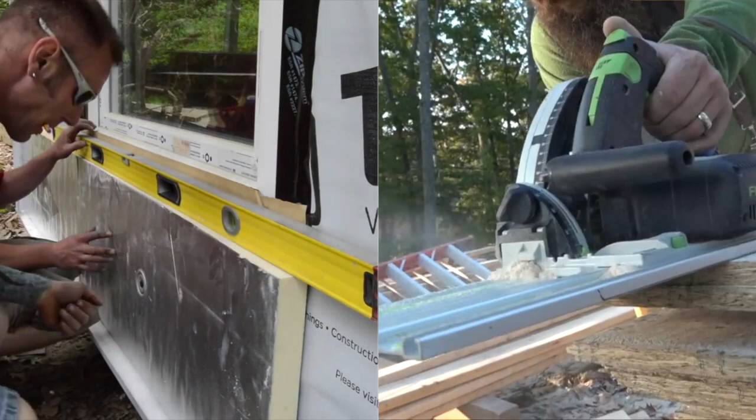We can get going again. We can get started on super insulated walls. Fat walls mean skinny energy bills. So I'm going to go over 4 different configurations for a fat wall, for a highly energy efficient wall.

There's a lot of ways to build super insulated walls. Continuously wrapping the outside of a house with some sort of an insulation like foam boards or rock wool is one way. Adding a second wall on the inside so you can blow tons of insulation into the cavity is another way. That would be double stud walls.

Thickening the wall on the outside so you can blow tons of insulation into the cavity would be another way, although less common in the real world. Exterior I-joists. And hyperbolizing a pretty standard system to make everyone pay attention to it is the 4th way, the awesome wall.

So these are just 4 ways to go about it. There's a lot of ways to go about it, but I think they illustrate different methods that are pretty different and how they solve different problems that you come up with.

The first one is going to be continuous exterior insulation. Sometimes people call this outsolation. I resist that with all my might. I hate that term. Lately, people have been calling it continuous insulation, which I think makes more sense because it is actually continuous. It says what it is, and it doesn't invent a new dumb word to describe it. I still kind of call it exterior insulation because I'm stubborn.

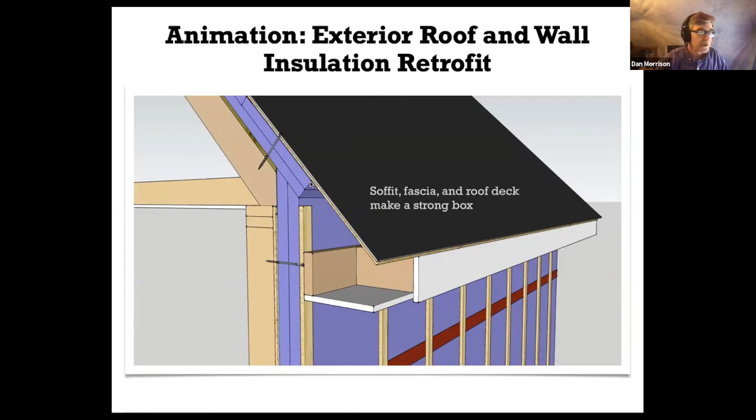So here's another early animation that I made right before we launched Pro Tradecraft. It's based on job site guidance from the remodeler who does a lot of work for Joe Lstiburek and Building Science Corporation. His name is David Joyce. Not only does David know what to do and why it matters, he knows where the beer is at Joe's house. So here's the animation of an exterior wall and roof retrofit.

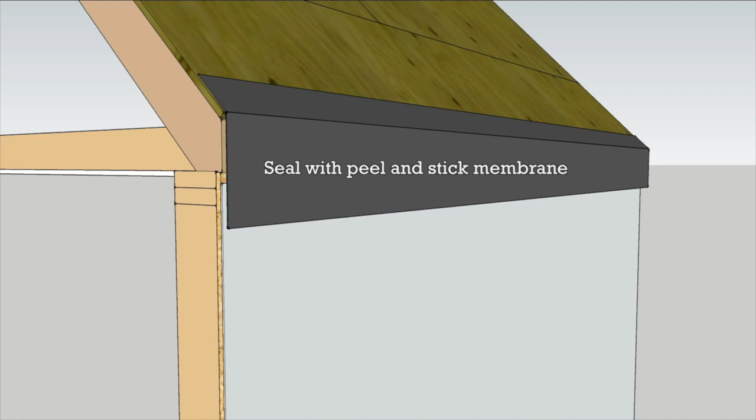Adding exterior insulation to the roof and walls of an old house can improve comfort and energy efficiency. It especially makes sense if the rafter cavities are already insulated, and it's most affordable when the roof and siding need replacement. The first order of business is to strip the roof and walls. Next, cut off the rafter tails so that the connection between the roof and walls can be sealed with peel and stick membrane. Install 2 layers of foam to the roof, staggering the seams and offsetting the joints.

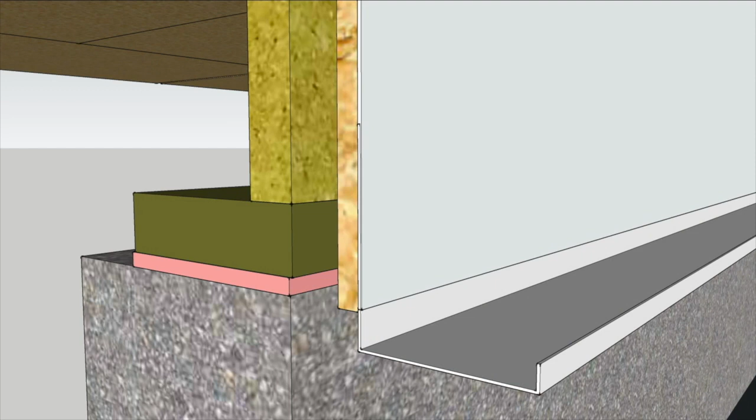Tape the seams on the outer layer. New roof sheathing goes on top, screwed into the framing 1.5 inches. Cover the roof deck with roofing underlayment that will protect against liquid water, but also allow vapor to escape. At the bottom of the wall, a piece of coil stock is bent into a J-channel to keep the bugs out. The metal is tucked behind the house wrap, and 2 layers of insulation go on the walls with the outer layer's seams taped for an air seal.

Attach a strip of bug screen to the bottom of the wall to keep the ventilation channels clear. At the corners, weave the foam panels together to disrupt any clear air path between inside and out. Corners are then wrapped with peel and stick to keep them tight. Furring strips are screwed through the foam 1.5 inches into the framing. Box out a soffit at the top of the wall and tie it all together with fascia.

Install the siding, making sure to detail the bug screen tightly at the bottom of the wall. Continuous insulation and multiple layers of air sealing turn a leaky old house into a 21st century home.

Copyright 2015. So we've been talking about this at Pro Tradecraft for 6 years, but we were talking about it at Fine Homebuilding and Green Building Advisor for at least another 6 years before that. In fact, that's how I met those guys. So it's not new, but it seems new to a lot of people, and now it's actually even in the building code. So let's have a peek at how Dave and his crew do it in the real world.

Again, Dave works a lot for Dr. Joe. This is not one of Dr. Joe's projects, but he uses the same details that he learned from the Building Science Corporation. It's a typical split entry ranch that was gutted and retrofitted into a weird modern house. Fun fact is the owner was an engineer, so it's kind of like the worst customer in the world is a retired engineer. So not only is he engineering, but he's got a lot of time on his hands.

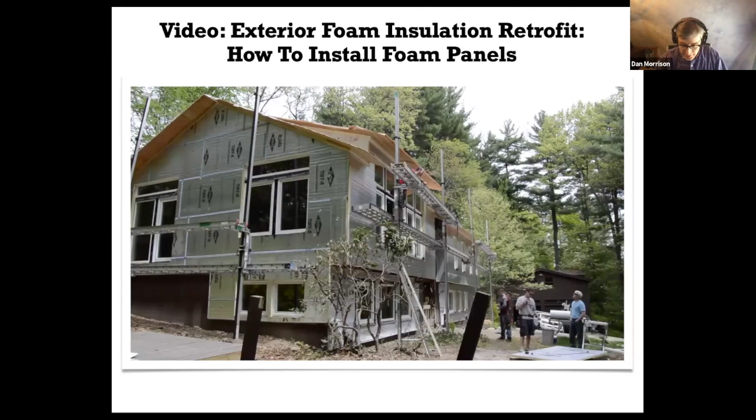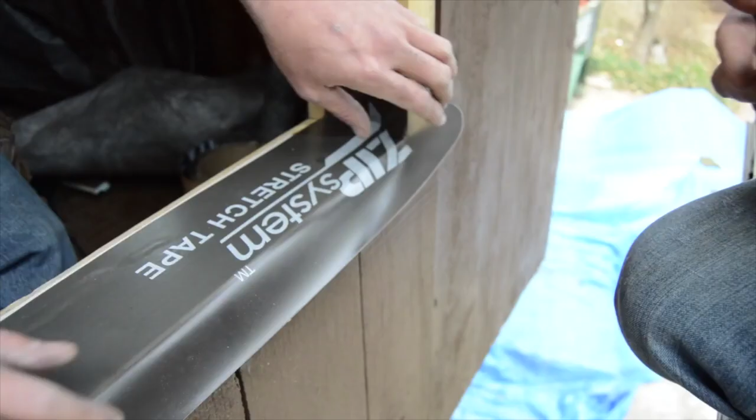Welcome to Concord, Massachusetts. This house is undergoing a deep energy retrofit and gut rehab. To boost the R value, 4 inches of polyisocyanurate foam is being added to the walls and roof. The siding, a sheet product designed to mimic vertical boards, is structurally sound, so it's being left in place and then covered with house wrap and foam. The windows were installed and flashed to the openings before the house wrap, and then the house wrap is sealed to the windows with a flashing tape.

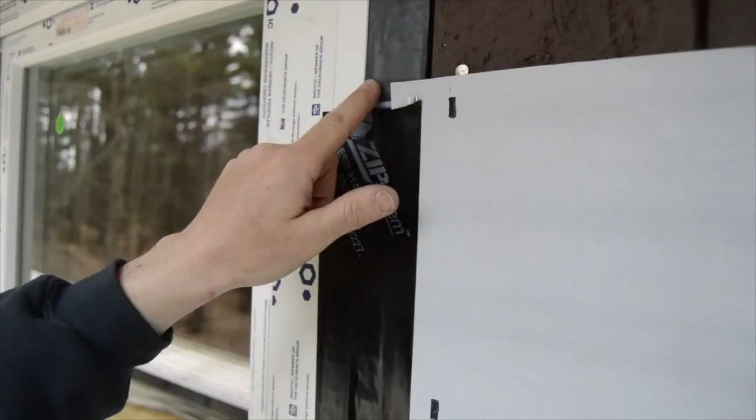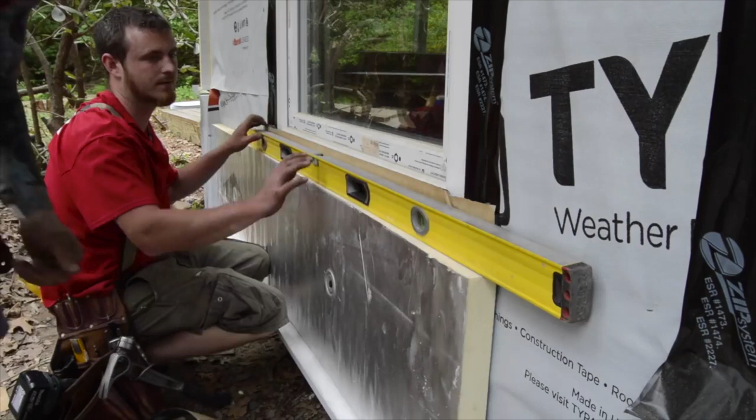Dave explains how flashing tape connects all the layers. Our flashing membrane from the outside, from the window itself, crossing right over the flange onto the sub-flashing and onto the house wrap. The sub-flashing protects our building from any leak that could happen in the window. The house wrap goes over that and is adhered to that, which makes a good air seal and water seal. The pan flashing is extended out so that it can drain water to the outside of the foam sheathing. Extra strips of flashing tape can extend the pan flashing more. This is where a split release sheet on the back of the flashing really comes in handy.

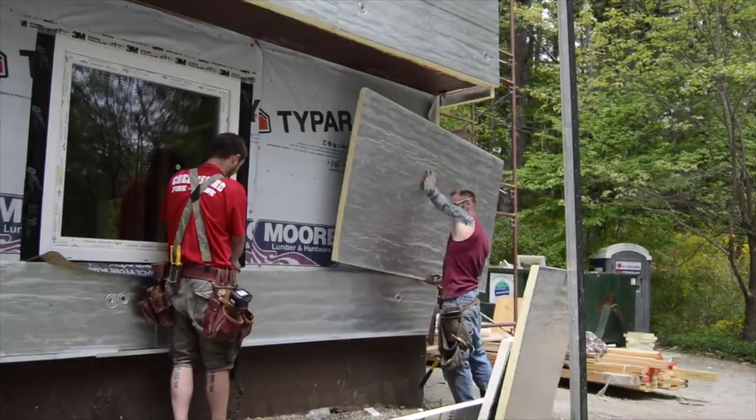The 2 layers of foam should have offset seams, so Calvin and Damien begin with a small rip that will fit continuously under the windows. The first course is kept level to keep the measurements consistent, and a metal cap at the bottom protects the foam from insects. It's great to use large pieces whenever possible for a better air barrier, but because there is a layer of house wrap and 2 layers of foam, it's safe to use up some random scraps. As long as it's not like 30. And there will be a lot of scraps. As long as the joints are tight and the insulation is continuous, piecing in scraps should be fine.

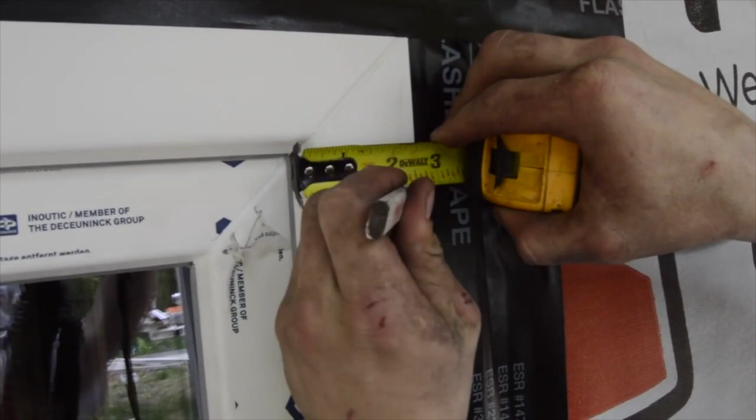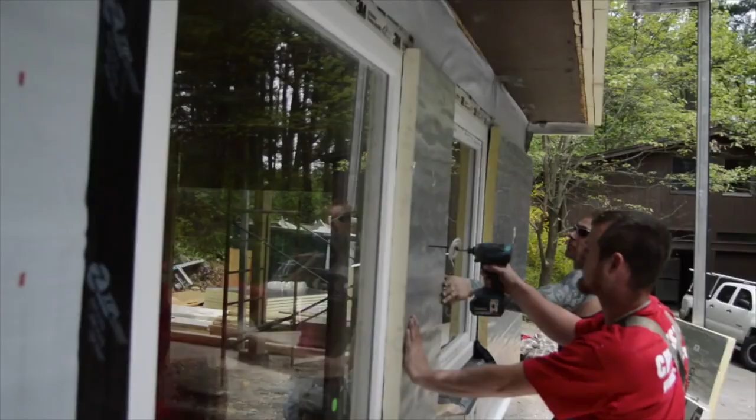As Dave said earlier, the foam will overlap the window frame to get a tight seal to this opening. In this case, the guys are leaving 2 1/4 inches of frame revealed. Also at the window, they pull the pan flashing out past the foam so that anything that leaks in is drained all the way out. Don't bother to tape the seams on this first layer, because as you compress the foam later, it will just pull the tape away from the seam. The second layer will be taped. As one guy installs, he can measure for the next piece. Working together, 2 installers ought to be able to keep ahead of one cut man.

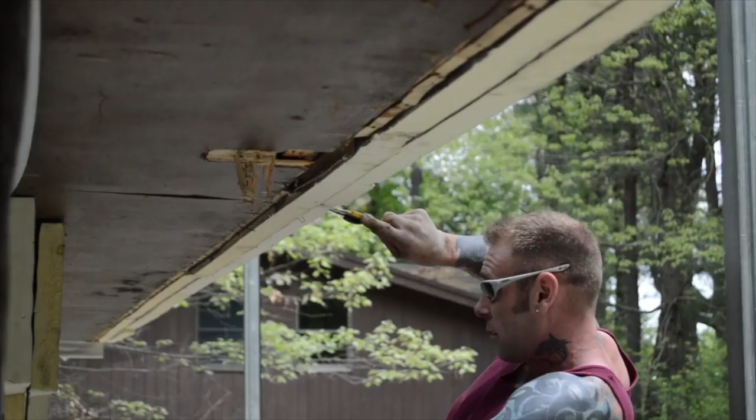Cutting foam sheets is pretty simple. You can use utility knives with extendable blades to get the whole depth on small cuts, and when cutting sheets in place. Angled cuts are needed where wall foam butts under roof foam. For long cuts, you can use a knife and chalk line, or you can use a table saw.

Yeah, so basically everything that we saw in the animation, but in the real world. Flash the window opening first, install the window, integrate the window with the WRB, making sure that everything seals back to the framing, and then leaving no layers open at the edges. It's a recurring theme we're going to be talking about all day today. Install the first layer of foam, not taping the seams, and using offcuts to fill the pieces whenever you can.

In this video, they'll install bigger pieces of foam on the second layer, and then they'll tape the seams and the corners. Again, the foam gets compressed, and if you spend all your time taping the first layer, you're probably not going to get as great a performance. Plus, you're paying someone to spend an awful lot of time taping an awful lot of little gaps with a bunch of little pieces.

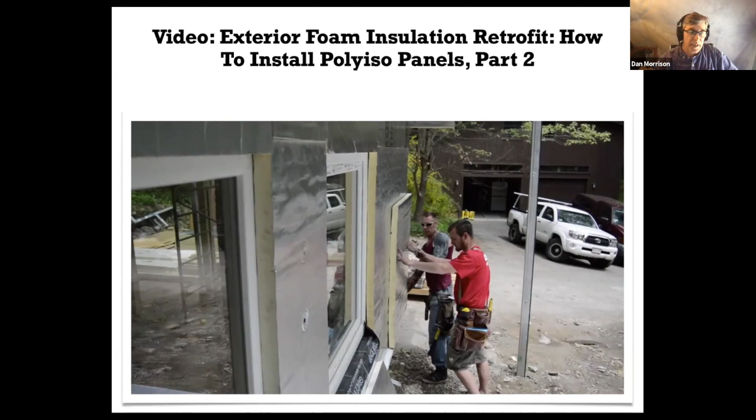So they'll also install furring strips for siding attachment after they install the foam. That's one sort of method of a rain screen, a vented rain screen wall assembly. There's also a few ways to do that. We'll look at one or two more later on. But let's look at the exterior foam job.

With the first layer of a 2-layer exterior foam retrofit installed, Calvin and Damien turn to the outer layer, which will be the primary drainage plane and air barrier. They begin with a starter piece, again attaching it with 2 screws until the furring strips go on.

You may notice that the seams are already taped on these sheets. That's because they wanted to pre-fit the pieces before we shot a video, and then they got carried away and taped the seams. Anyway, the foam is tucked tightly into the bug shield, and they install as close to full sheets as possible. Certainly, they cover seams in the first layer with solid panels in the second.

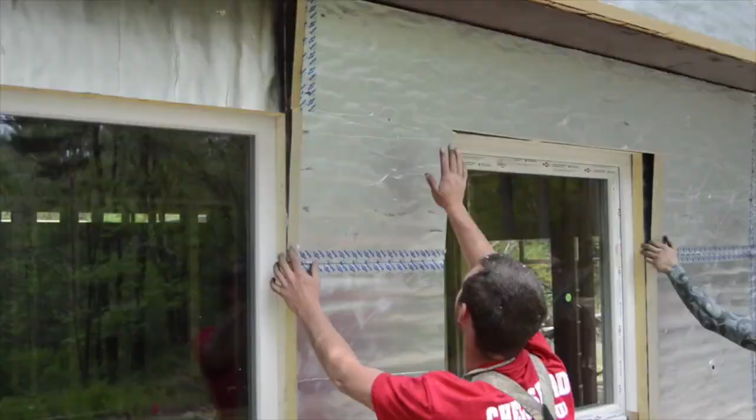Again, the pieces should be snug. Typically, they work from one corner to the other. In this case, the middle of the house is broken up by a large staircase, so they are working from each corner towards the middle. Once the corner is plumb and level, they fasten it off. Again, succeeding pieces should fit tightly. Cantilever sections, like outside corners, have woven edges, so there is no straight line for air or energy leaks.

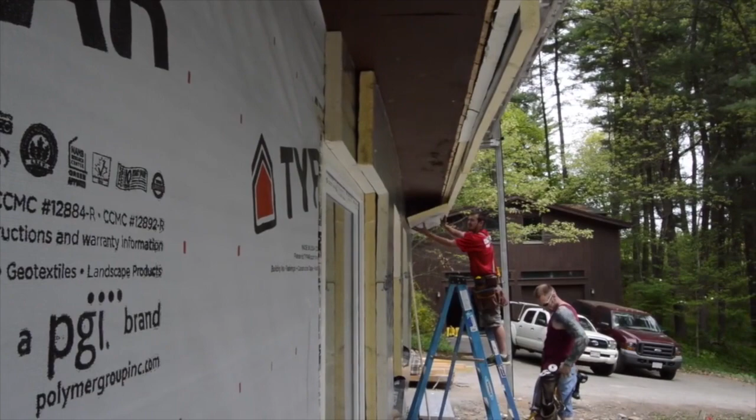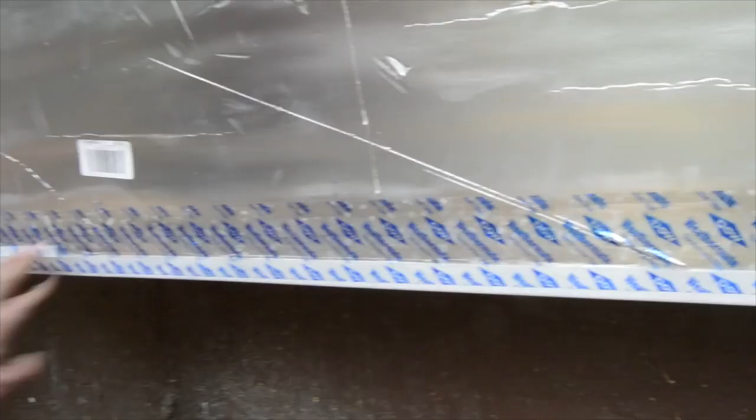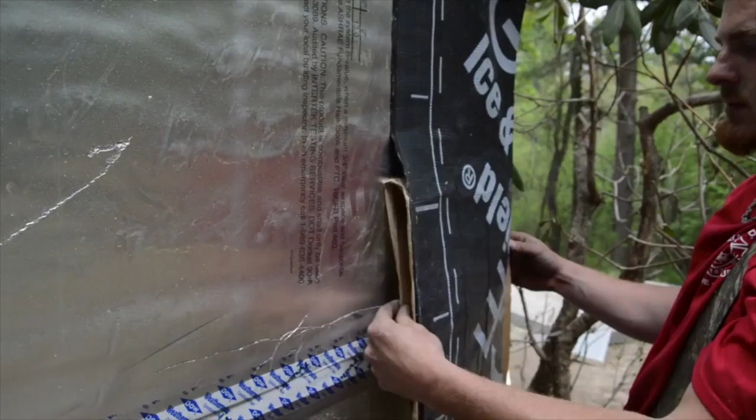The bottom of the foam and any exposed edges, such as at a basement knee wall like this, are wrapped in a metal channel that keeps the bugs out. The metal is sealed to the foundation with silicone caulk. Next, the seams and edges are taped with contractor tape. The metal bug shield is taped to the foam also with contractor tape, as are the inside corners and cantilevers. Outside corners are sealed with a wide strip of peel and stick membrane to cover the staggered corner sheets.

Next, foam under the windows is sliced at a downward angle to extend the sill pans sloping to the outside. And the peel and stick is peeled and stuck to the foam. Calvin explains the process. I think it's better to start from the middle, because then you get less wrinkles and stuff, and you work your way outward. Do a little cut, not all the way into the corner, just a little one, so you can get this stuff rolled over a little bit. So that corner's nice and watertight. Notice that he cuts the corner shy and bends the membrane to keep the bottom point watertight.

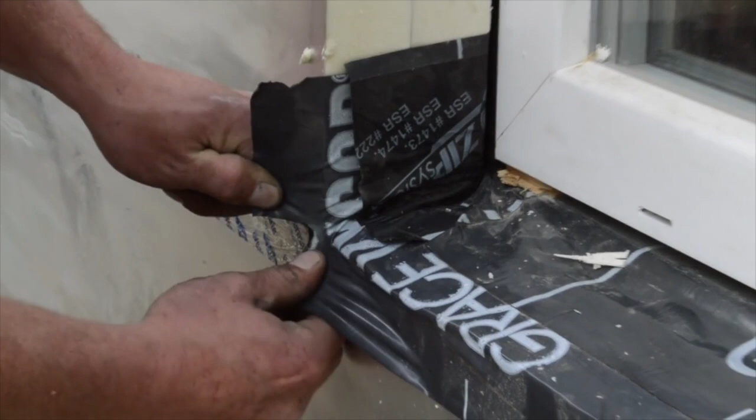With the seams, edges, and corners taped, they turn to installing strapping for a rain screen siding assembly. 1x3 utility grade strapping is fine. The second layer of screws are longer, obviously, than the first layer of screws. These are about 6 inches versus 4 inches on the first layer. The screws are countersunk by cutting partial holes in the furring strips with a spade bit.

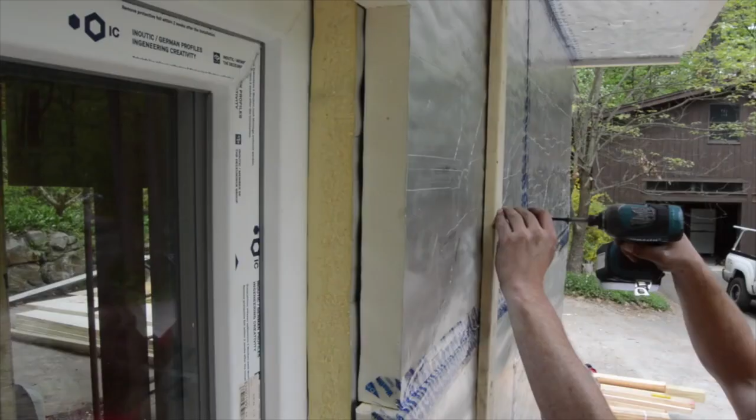As the furring strips are secured to the framing, the foam is compressed inward. This can make for a wavy wall when it's time to install siding. At that time, the crew will pull a string across the entire wall and either drive in the screws or back them out to get a nice flat plane. That string line process is not worth doing now because the wood framing may still expand or contract before it's time for siding.

Okay, so let's head on over to double stud construction. You can do double stud walls many ways. I've seen photos of people lifting double walls that are like a foot thick. I always wondered how they frame them like that. It's probably not that difficult. And I was expecting to see it happen when I visited a job site in Maine where they were building a double wall house. Ben Bogie was the lead carpenter.

But what I saw when I got there is that they just framed the outer walls with 2x4s, stood them, set trusses, got the house dried in, and then came back later and framed inner walls. So it wasn't very exciting to shoot video of, but I was there. It is a heck of a lot faster than framing twice as many walls from the get-go, and it's half as heavy a wall to lift, so it makes sense.

I actually built a double wall structure once back in the 90s. The prevailing advice then in the hippie home building journals was to use like a 2x8 bottom plate and stagger the studs, and then the insulation was woven between them. This is absolutely not the best way to do it at all.

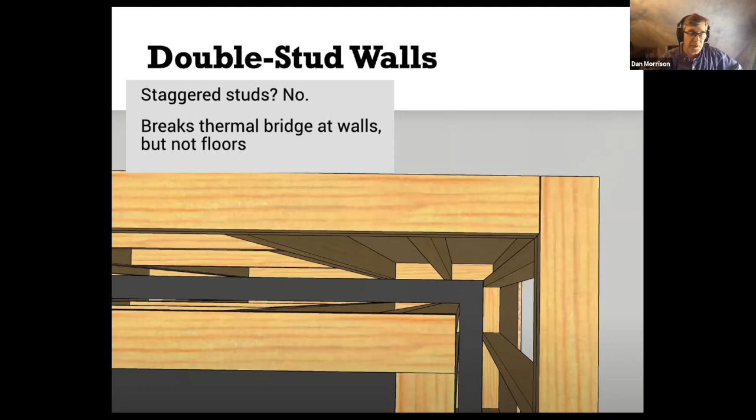The double stud structure that I built was a practice space for a rock band, and we were just looking for soundproofing, and it was pretty darn quiet. But for houses that people live in, you usually want a thicker wall than 7 inches, and staggering the studs isn't necessary. So here's how Ben does it.

We learned earlier from Ben and his crew how to frame basic exterior walls using 2x4s. It may have seemed like a low bar on the energy efficiency scale, but that's because the house will have 12-inch thick walls using a double wall approach. With the outer walls framed, sheathed, stood, and capped with a roof, the crew can turn to framing the inside walls. Tight up to the plate.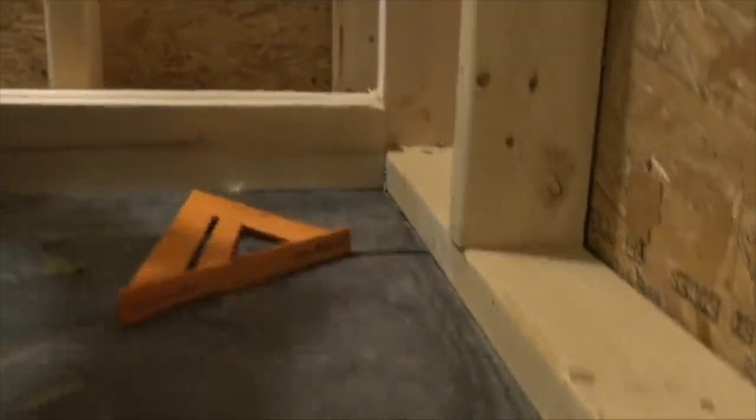Begin with plate stock butted to the outside wall. And then what I'll do is I'll measure. We're going for 12-inch wall thickness, minus our 3.5 inches for our intersecting plate. So I'll mark my plate cuts there. Let's take another look at what just happened.

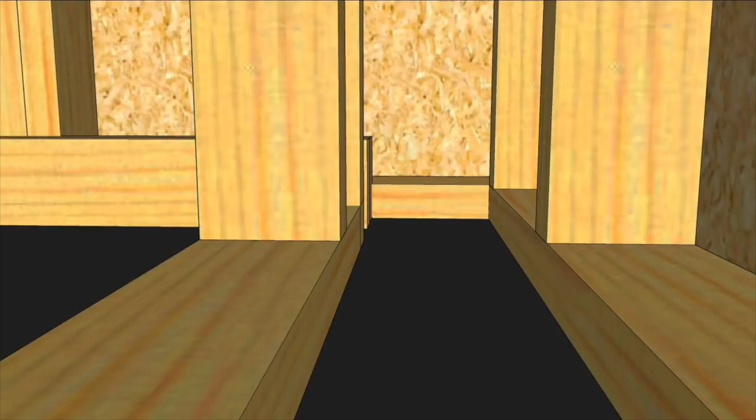It's as simple as just coming right across, transferring your layout of your existing. Copy the wall layout on the inner plates, including windows and doors. Break the ends on studs just like regular wall framing.

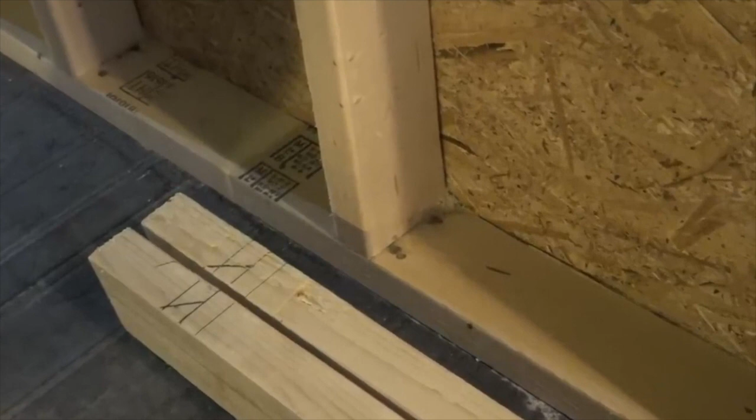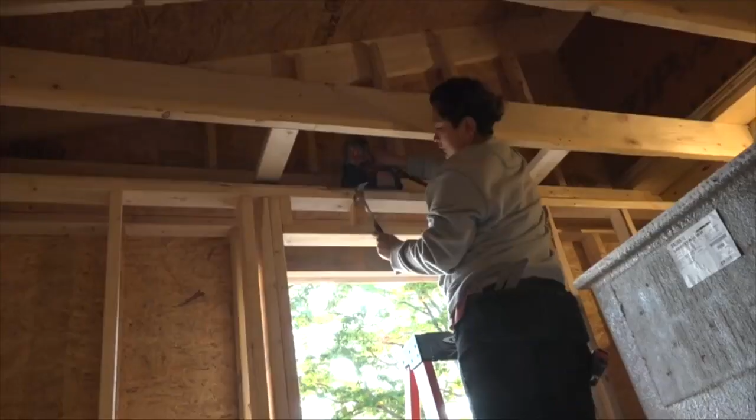These hieroglyphics contain a lot of information. The marks begin at the correct line and cross over the line that should be ignored, and also indicate what side of the line is waste. They transfer layout marks from the top and bottom plates to headers and sills, and they fill in the window and door openings. To reduce alignment problems, they frame the interior openings to be slightly larger than the exterior ones. The header on this door is about 1/4 inch higher than the header in the exterior wall.

With the window and door openings framed in, it's time to install window bucks to bridge the opening. Ben uses sheets of 3/4 inch subfloor ripped to just under 12 inches. Obviously, the rough openings need to be framed 1.5 inches wider than the window schedule calls for if you're going to buck out the openings with 3/4 inch subflooring on each side.

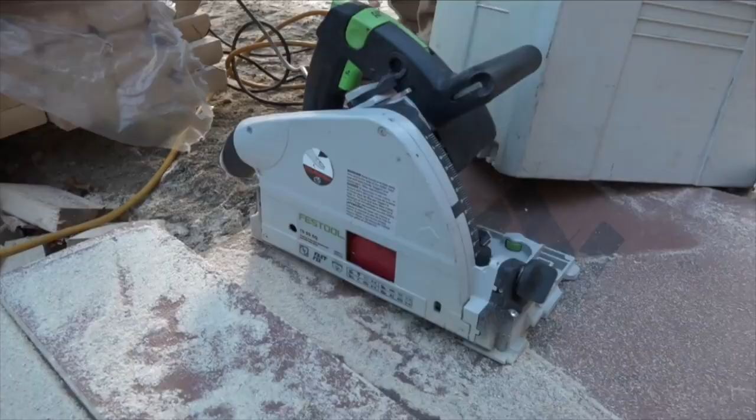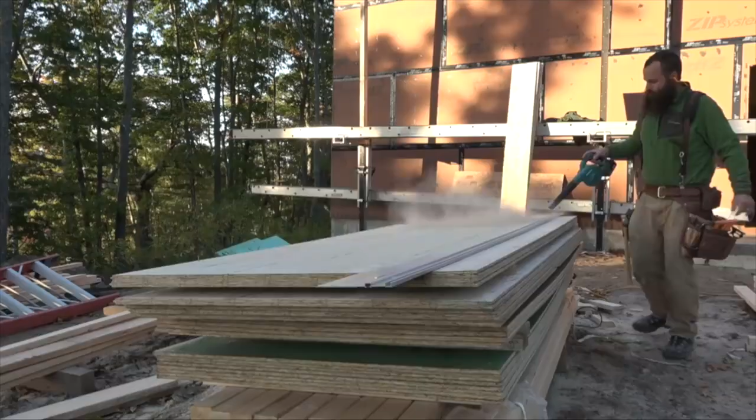Combined with the blade thickness of a few cuts and the size of the gap that's engineered into the size of these sheets, he should end with just a whisper of a rip at the end, mostly just cutting the tongue. Align the edge of the track to the marks, plop the saw on the track, and cut. Looks like it was 11 3/4. He cuts the sides, tops, and bottoms to length using blocks strategically placed to either support the stock or let it drop.

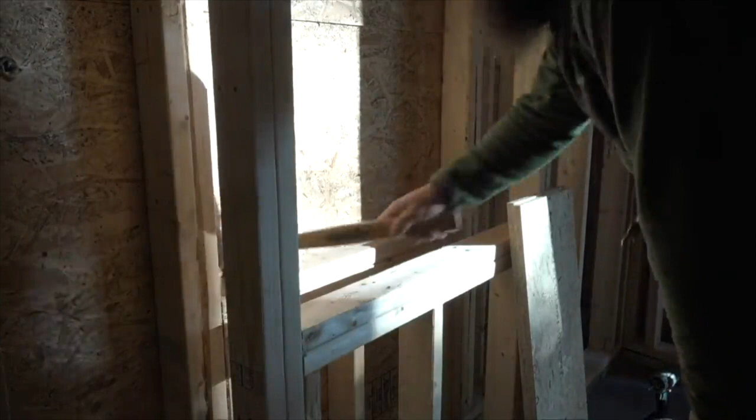Inside, he places the bottom buck first, but first he whacks the framing a bit just to remind it who's boss. The bucks are fastened to the framing of the exterior wall only. They're also aligned with the outer edge of the framing, which means the inside edge is inset about a 1/4 inch from the face of the framing.

Yeah, total wall thickness is 12 inches, so I rip them a 1/4 shy because if we have any bow in our wall, I don't want them protruding past and having to come back and either sand them or cut them off. There's nothing critical about the inside edge. Nothing references off it.

We'll set the bucks, waterproof them, and then later, after everything kind of has a week or two to acclimate, before we go to set the windows, we'll shim the openings so that we know that they're dead true, square, plumb. It's not super critical, but that's the game plan.

With the bottom and top bucks in place, he slips in the sides. Again, the critical edge on the window bucks is not the inside one, as Ben noted earlier, because nothing references from it. The critical edge is the outer one, snugging up against the wall sheathing.

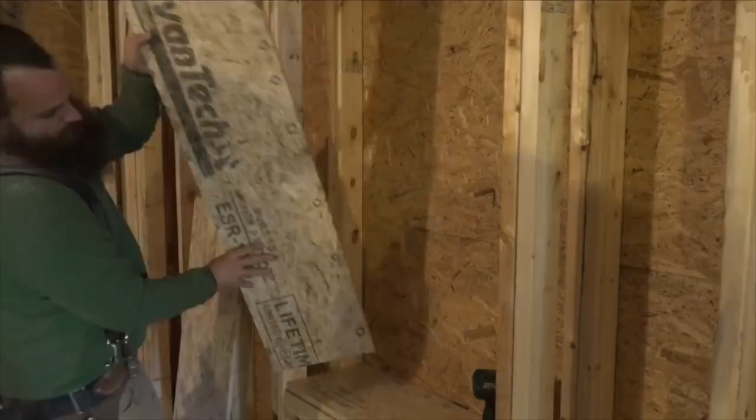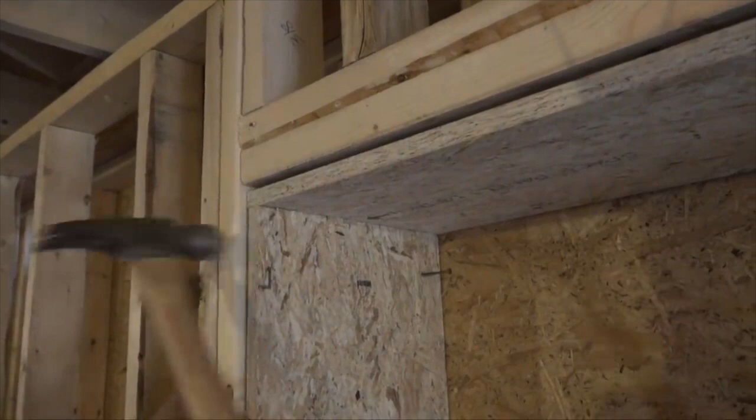Now, all that's left to do is cut out the sheathing. Rather than blind cutting with a worm drive, Ben uses a router and flush cutting bit. He drills a location hole for the router, pokes the bit through the hole, moves sideways and down, and runs along the bottom buck. Now, he glides the router around the window openings until he gets back to where he started. After cleaning up the edges, he'll be ready to apply some liquid flashing to the window openings.

Next time. So frame the outer walls with 2x4s, makes them easier to lift, and transfer the layout to the inside wall plates, and frame the inner walls also with 2x4s, and then make the window and door openings slightly larger than the openings that you framed in the outer walls, which will allow for humpy lumber and just give you a little bit of room for error.

There's a variation on this method that I also saw up in Maine at a passive house construction site. The builders were GO Logic, GO Logic is the name of the company. The outer walls that they were doing were made with SIPs, right? So they stood SIPs walls on the outside, buttoned them up tight, set the roof trusses on top of that, got it all dried in, and then once the house was dried in, then they ran 2x4 interior walls and blew about 9 inches of insulation in there.

So it's an even quicker way to get an exterior shell that's pretty tight and complete before the rest of the walls even need to be framed. A little more expensive than double studs, but you know, if you're battling the weather, it might be the way to go. So that brings us to the third method, which is less common, but totally valid.

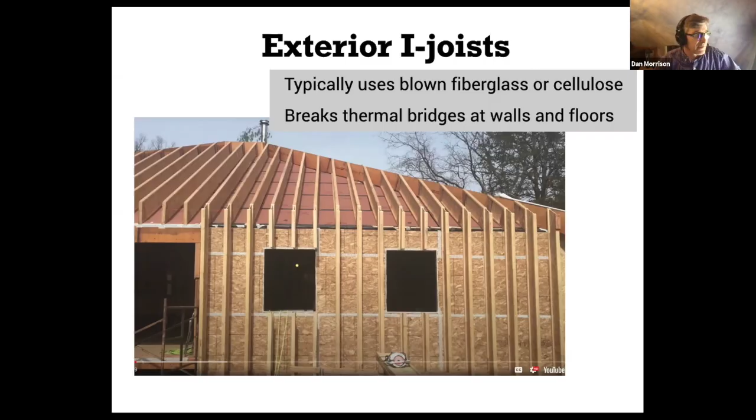Passive House certification is like a badge of honor for designers and builders. It requires extreme airtightness and energy efficiency, and it usually involves very thick walls. It's hard enough with new construction, but retrofitting an old building to Passive House standards is no place for sissies. This cabin will get a modified Larsen truss system, where 12-inch engineered I-joists are fastened to the outside of the walls and roof.

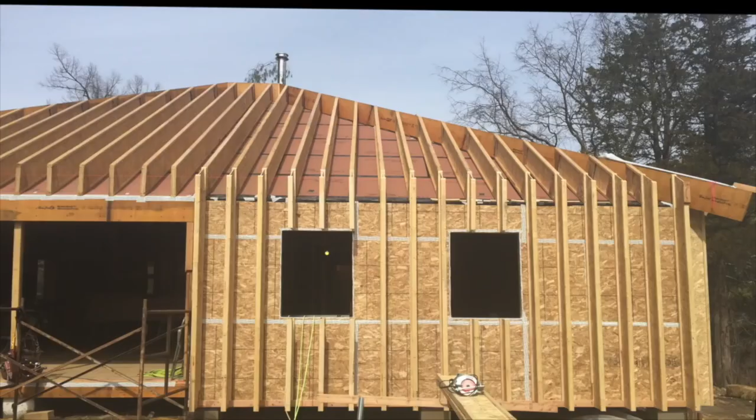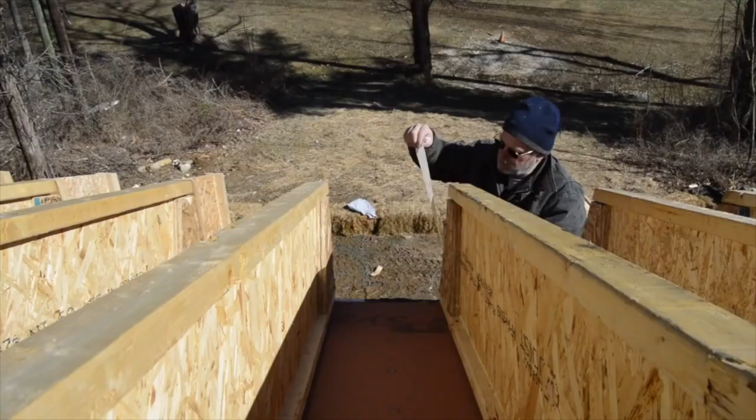Extreme airtightness begins with taping the wall sheathing. Now it's time to thicken the walls and roof. As they work along the wall, Charles repairs nicks in the sheathing tape that occurred during roof construction. Before delivering the I-joists, Tony pre-sinks screws in the flange where the top plate is.

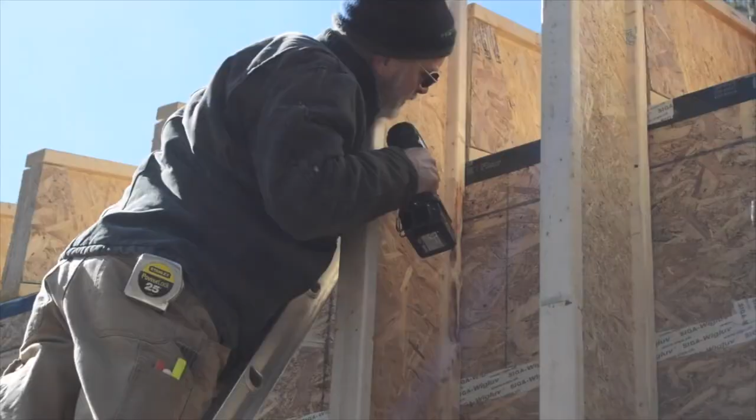The joists sit on a ledger at the bottom and align with the rafters at the top to keep a continuous thermal cavity. To avoid thermal bridging to the inside, the new framing is offset from the existing framing. The wide flanges are screwed into the top plate with 6-inch structural screws. The joist is then adjusted plumb. Bottom's gotta go towards the front of the house. And screwed into the rim joist.

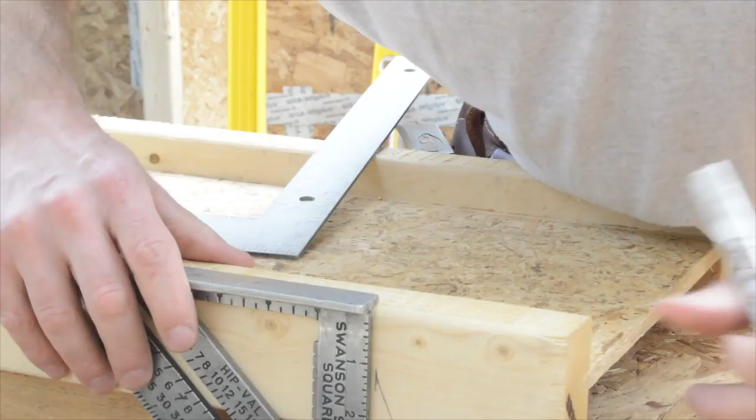After lunch, they move to the sunny side of the house, where they keep installing I-joists to the outside, skipping over the window openings for now. Cutting the I-joist is done with a couple of saws and a couple of jigs. Notching the bottom is done with a 7¼ inch circular saw, adjusting the blade depth to the flange width. The length of the I-joist is pulled from that notch to the top point of the roof angle.

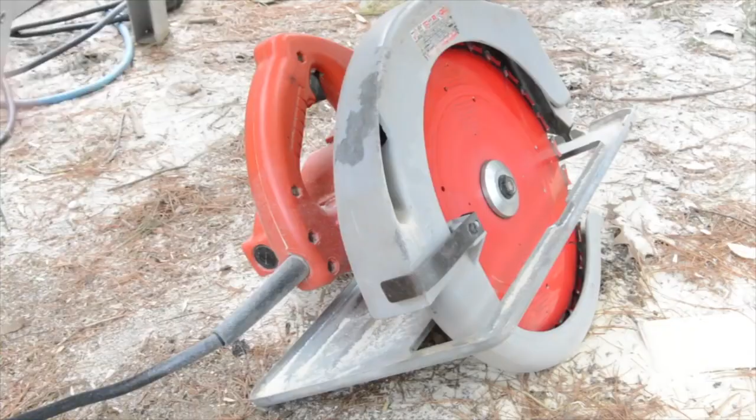The cutting jig is made with a couple pieces of plywood and a 1x fence. The lower piece sits between the flanges and the upper piece overlays them. The flanges are scribed and the jig is slid over until the lower piece aligns with the flange marks. The angle is the complementary angle to the roof pitch. After the jig is clamped in place, the upper piece acts as a saw guide while the lower piece indicates the cut line.

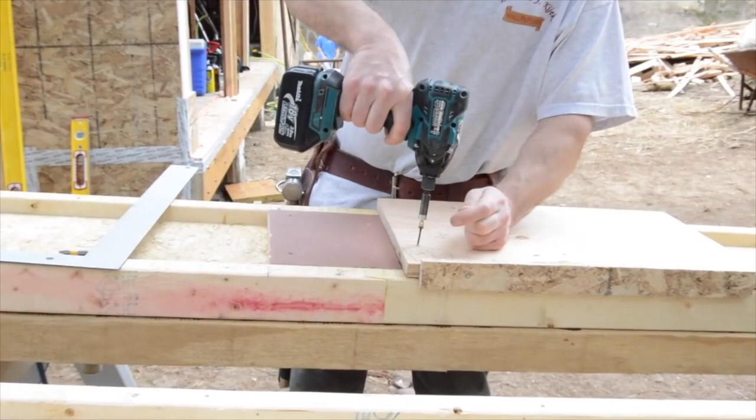Filling in under the windows uses up some of the short pieces and requires another jig with a 1/4 inch per foot slope. Here, Tony's making one. He has offset the 2 pieces of plywood the distance from the saw blade to the edge of the saw table, and then he screws them together. A scrap of OSB is used for the fence on this jig. Looks like it works. Now they fill in the window framing, resting the notch on the ledger and screwing the flange into the window framing.

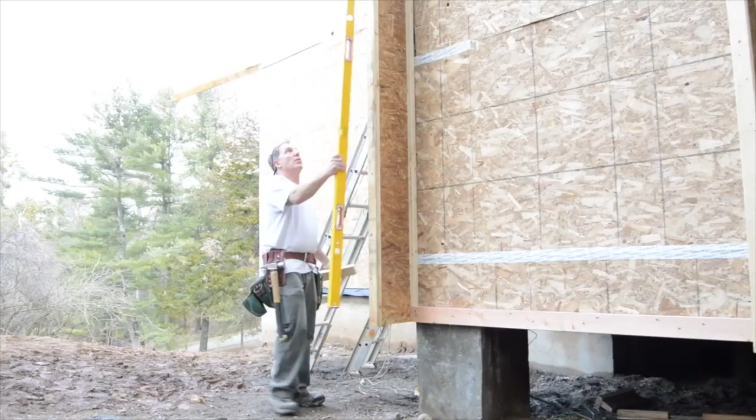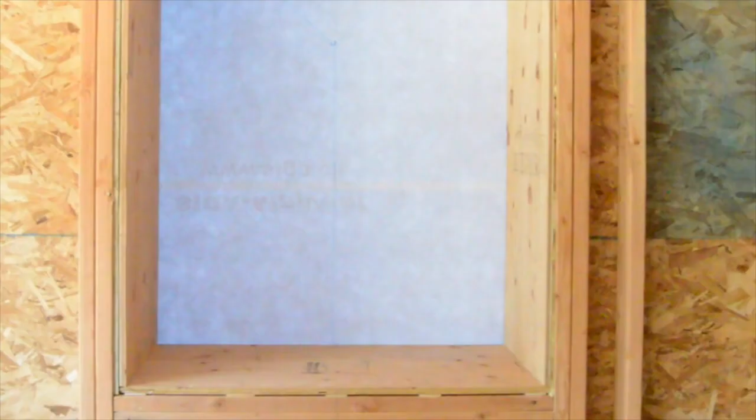Because the existing framing and structure is a bit on the wonky side, they run a string line down the walls at the bottom and top. They check along the wall at each joist for variations, and then they adjust with shims. This will give a straight wall when it's time to hang siding. Later, the window opening will be boxed out with plywood, which is shimmed plumb, level, and square. But first, we're going to head onto the roof and see how they pull off that piece of the puzzle in the next video.

So, turns out pretty straightforward. Attach a ledger to the bottom, notch the I-joists, offset the existing framing to break the thermal bridge, and screw the joists into the top and bottom plates for a solid connection. So that adds about 11 inches of insulation to the outside of the building, or maybe 35 Rs stuck into the system. And that brings us to the last wall example, but not the last possibility.

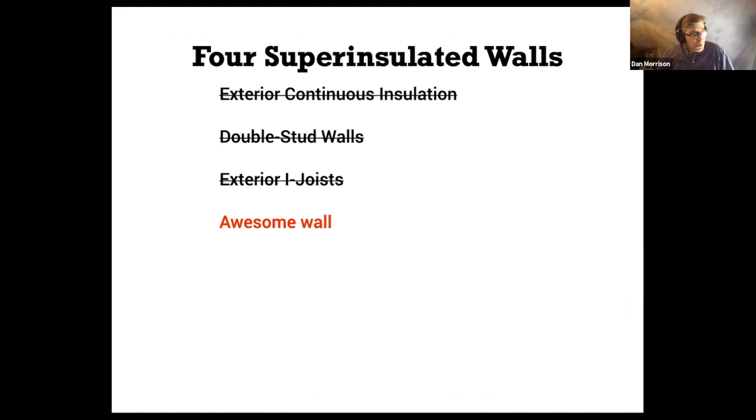Here's a wall design that was invented by a local guy to you all, Michael Anschel, OA Design Build in Minneapolis. Michael wanted a wall that would satisfy Dr.

Joe's control layers, but still be easy enough to install that people in the field could make mistakes, as they sometimes do, and the wall design would be able to overcome those mistakes. I've worked with Michael for a long time and can tell you he's a great builder. He knows how to do this stuff and why it matters.

And we just finished a really cool show called Building Resilience, which you should look for. One thing about Michael is he does tend toward hyperbole, so he calls it the OA awesome wall. And we'll see how awesome it is.

The so-called awesome wall uses continuous exterior insulation outside the framing and a closed cell spray foam flash coat between the studs. The spray foam does a good job of stopping airflow in those cavities, and it adds R13 roughly to the wall assembly. Outside the continuous insulation is a drainage mesh rain screen product. There's a few of them available from different manufacturers.

One advantage the entangled mesh system for rain screens has over furring strips is that air can move up, down, and sideways without being restricted by the furring strips. As we saw in the furring strips earlier, the air can't move sideways, it can only move up and down. And so if you butt them to the soffit, air can never escape. So you have to make sure that the air can escape and that it can move around back there.

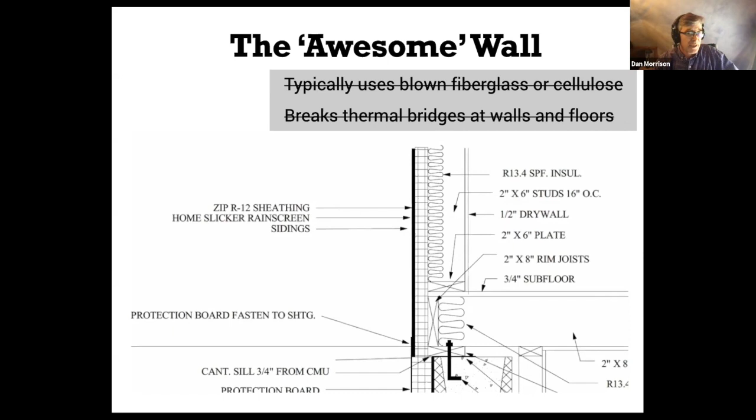And that happens underneath all the windows as well. So not a big deal, but it's a place where people can make a mistake. And that was the point of Michael's wall, is to eliminate as many consequences to people making mistakes, because he doesn't feel like you're ever going to eliminate mistakes.

So I wanted to add this video because it puts a lot of the stuff that we've been talking about in the context of a whole house that is actually complete or nearly complete. It also includes some talk about rain screen systems, which I think is important, and pulls siding and windows into the picture. Anyway, the whole package is kind of put in context: the exterior insulation, the rain screen, the spray foam between the studs for the air sealing.

He calls it an awesome wall. He also tends toward hyperbole, as I said. He's also a great builder who is not out to lose money on callbacks and rotten houses. So, you know, I trust the guy quite a bit.

This house that we're looking at was basically a flip for Michael. They bought a 100-year-old house, added some square footage, fixed the layout, added a couple of bathrooms, tightened it up, and sold it. And this is somewhere in the middle of the process.

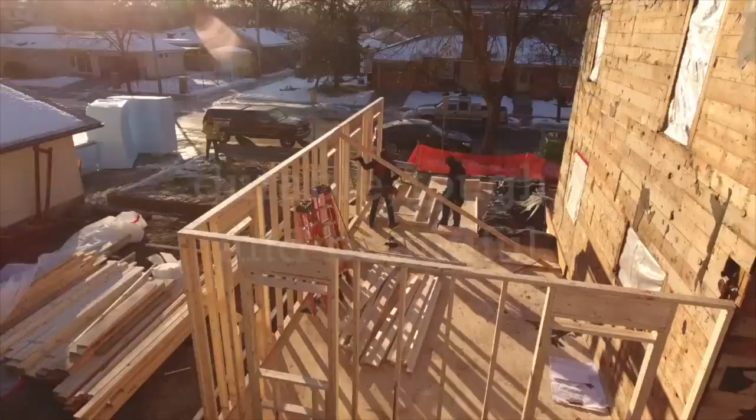Here we are, just under 2 months into construction, and it's gone from excavation to framing to turning completely green. We've already got our electricians and our HVAC guys inside. Our plumbers have already been inside. We're just clicking along at a really great pace.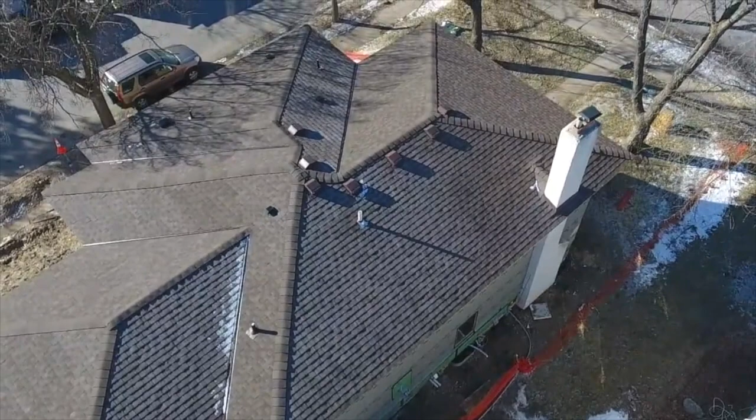One of our goals in this project was to show that you can develop a house in an urban lot that doesn't overshadow the adjacent houses, kind of towering eyesore that makes all the neighbors angry. It's a 4/12 pitch, and we used the 4/12 pitch because we wanted to keep the profile of the house low. The only downside to this roof design was that we weren't able to make use of a ridge vent to provide the ventilation for the attic. That meant we had to stick with soffit vents and a few turtles up top, but still fewer than what it was.

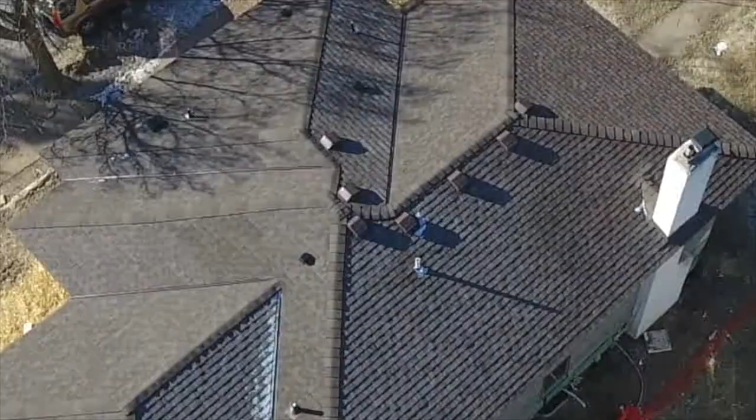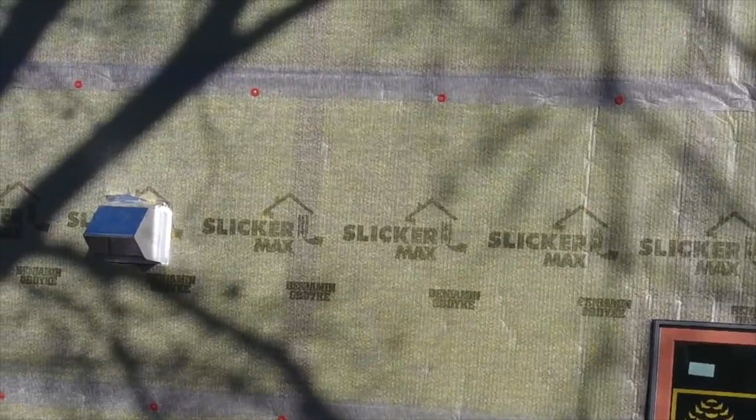So when we talked about what makes the OA Awesome Wall so awesome, it's a combination of parts. Our ZIP System is obviously a core component in that system. But what we add to that is the Benjamin Obdyke Slicker Max, and that is our ventilated rain screen. It's a multi-directional system. It's not just channels between strapping or battens where it's just going up and down and you have to make sure it has a release point. It goes left, right, diagonal, etc.

So if somebody accidentally screws something up, if they didn't leave a wide enough gap at the top where the cladding meets the frieze board, we're not going to end up with a wall that isn't venting properly. You also see a bunch of white furring strips going up. This is another component in the system. That is what's going to hold the solid cellular PVC cladding and trim system so that they stand off from the wall an extra ½ inch or so.

This is important because it's a cellular PVC cladding. Cellular PVC moves a fair amount, and so we need to give it space to do that. So those corner boards overlap the siding. The siding runs back behind them, and it gets about an inch gap on either side of the wall.

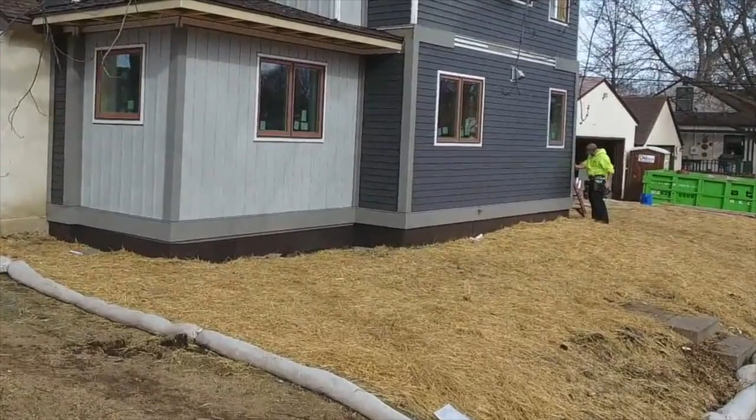The siding is pinned in the middle, just like a typical vinyl siding install, so that it can move left and move right. The board and battens are pinned in the middle, and they move up and down, except at the deck where they're pinned at the bottom and they only move up. So the real trick with this system is just knowing where to pin the claddings so they can move in the right direction.

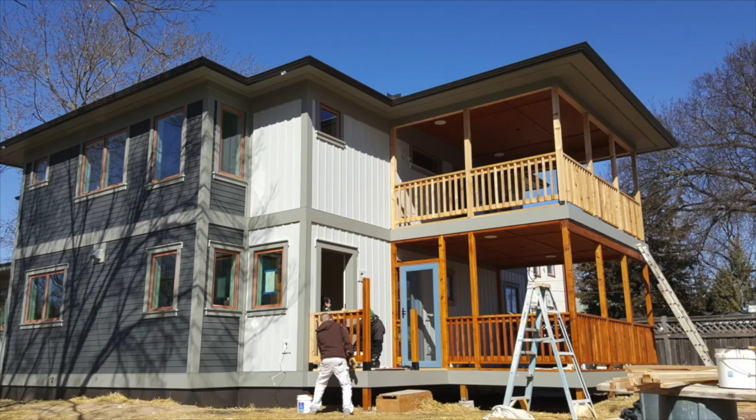So solid cellular PVC, this is called Celect, and it's from Royal Building Products. Those corners are single-piece corners, so they are already pre-90'd, and they come in very, very long runs if you want them. They make for just a beautiful, clean edge. But more important than that, the entire cladding system has a Kynar 500 finish on it.

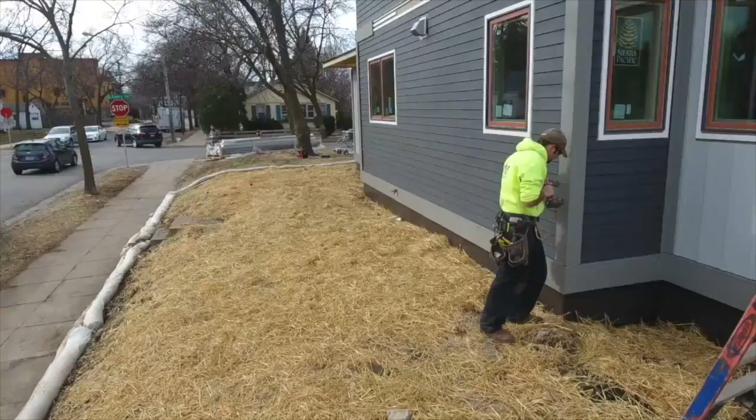Think of it like an automotive finish or a metal roof, where you're putting up a product that will last for a very, very long time. It's a lifetime warranty on the product. That Kynar 500 finish has a 25-year warranty against 5% fade, and that's saying a lot.

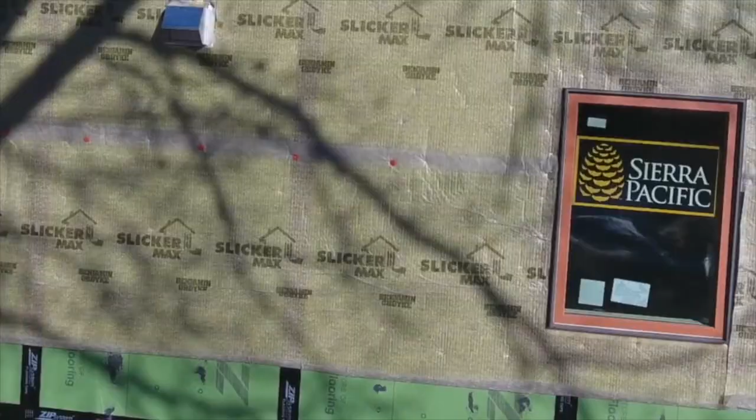This is another cool component in the system. This is a vinyl window from Sierra Pacific that has an extruded aluminum exterior and a solid wood interior. That's cool because, you know, when we're doing energy efficiency, we look to vinyl windows to be more energy efficient. Unfortunately, aesthetically, they're still ugly.

So we have the attributes of a vinyl window, but we get the extruded aluminum on the outside for the durability, which makes the consumer happy. And we have the solid wood interior, which makes the consumer happy, and it's aesthetically beautiful. So it's a win-win in all three layers of the window.

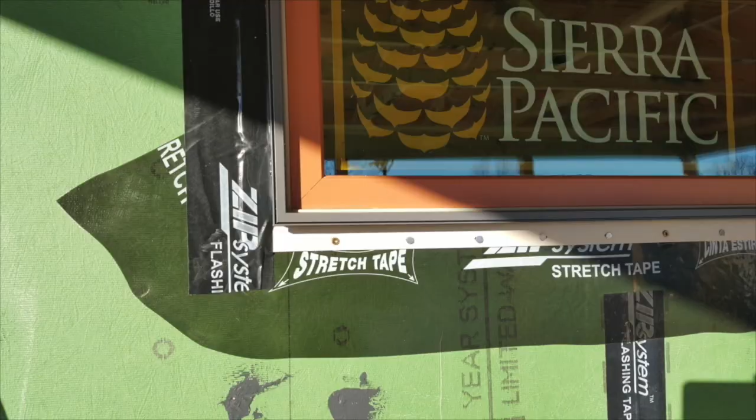The other thing about this window that I like is it doesn't have fold-out flanges. So when you're installing it, it's a solid vinyl frame. Makes it much easier to square up in the opening, much easier to install.

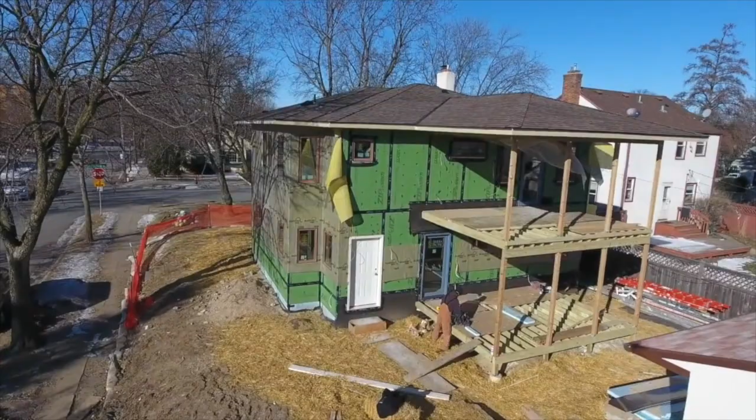Like everything else that we did in the system, we were trying to come up with multiple redundancies because the reality of our industry is that things get screwed up, and we have to assume that 5 to 10% of whatever gets put together will get put together a little bit wrong. In this case, you could put it together 40% wrong, and we would still have a ventilated rain screen.

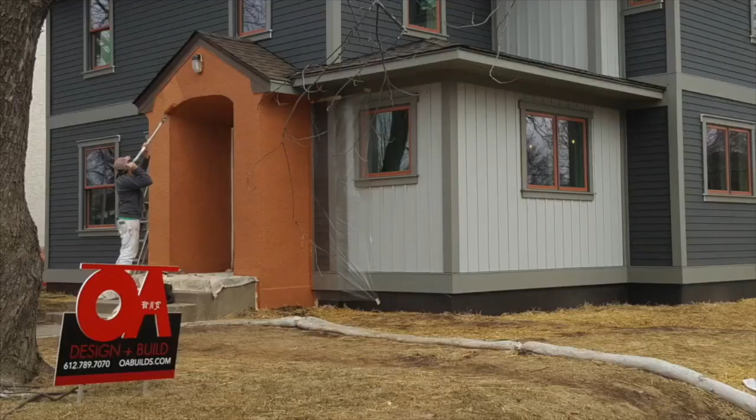And that, to me, is key in making sure that wall actually is able to resist any rot, moisture accumulation over the next 100 to 200 years. So we call it the OA Awesome Wall, a 200-year wall, because making that wall fail at this point becomes incredibly hard, even with people making mistakes along the way.

Okay, so that's basically the end of the superinsulated wall section. Four approaches to wall systems, four very different approaches to wall systems that stop water, air, and heat. They all do it differently, but they're all effective. They all have some challenges and they all have some benefits. And as always, it depends on the house, the crew, and the materials at hand that are available and that your crew is used to working with.

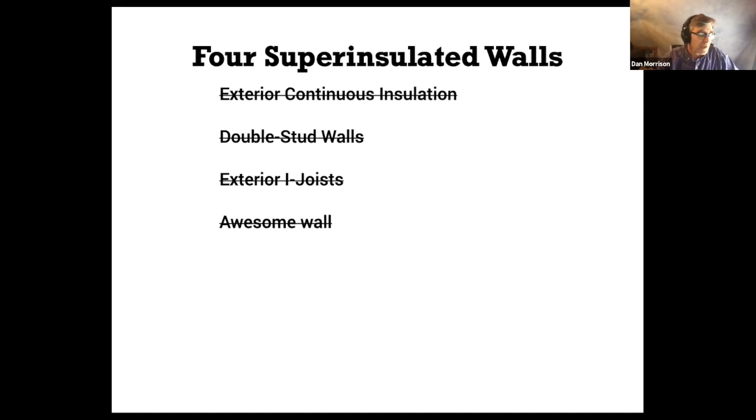There are a lot more videos about this type of stuff on Pro Tradecraft, and additional information in places that I keep sending you to: Building America Solutions Center, Building Science Corporation, Green Building Advisor. Feels funny for me to send people to what's technically my competition at Green Building Advisor, but I was one of the founding editors there and I trust the heck out of those guys. And so I want them to succeed.